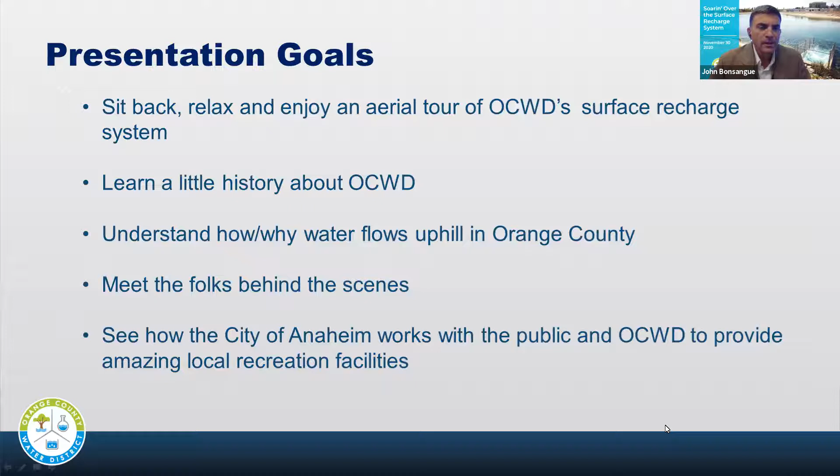At this point, we're going to do a little bit of a video flyover first to give you a, let's call it, a 40,000-foot view of the recharge system on video. And then we'll start looking at individual basins on still shots.

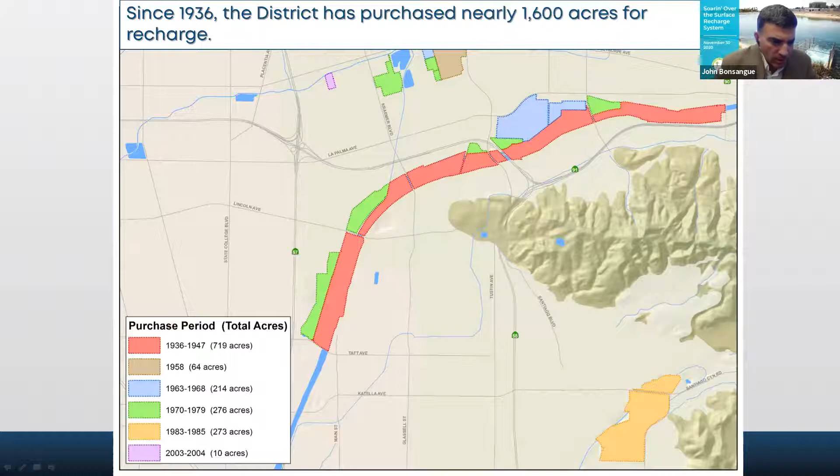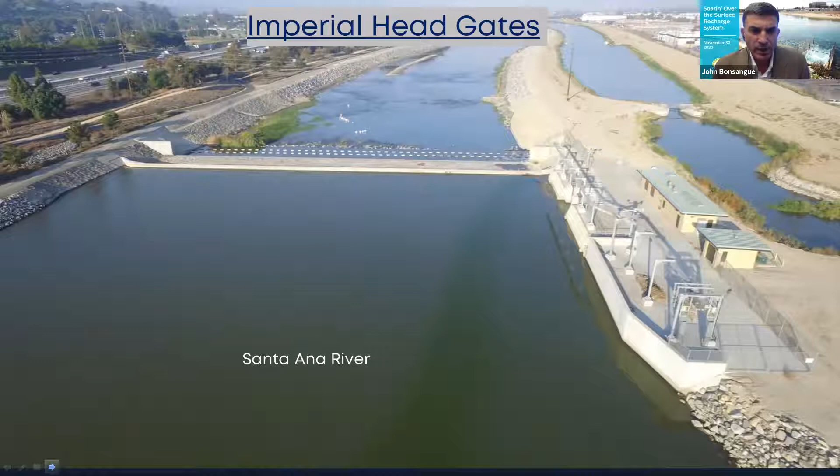This is just downstream of where Imperial Highway crosses the Santa Ana River. This is where we get our first opportunity to divert the water into our spreading basins.

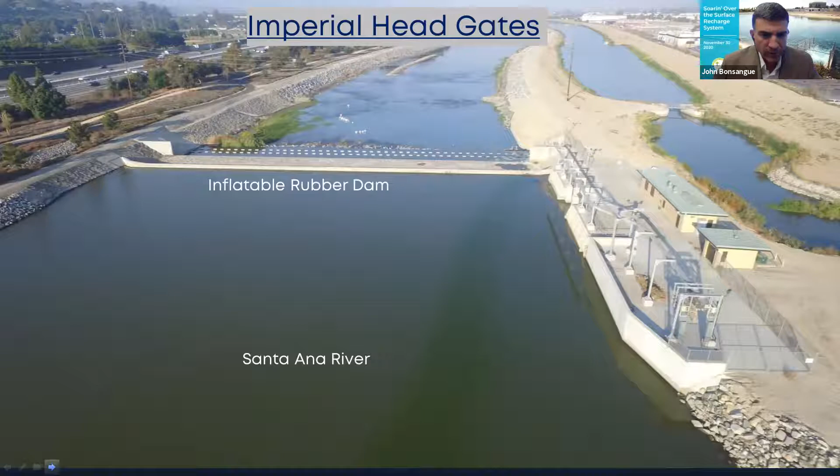We have this inflatable rubber dam, which is inflated in this image, and that dam is critical. It allows us to bypass water right around the dam, as shown in the orange arrow there, or move water into the off-river system, as shown with the second orange arrow there. And once it's into the off-river system, it can move by gravity downstream.

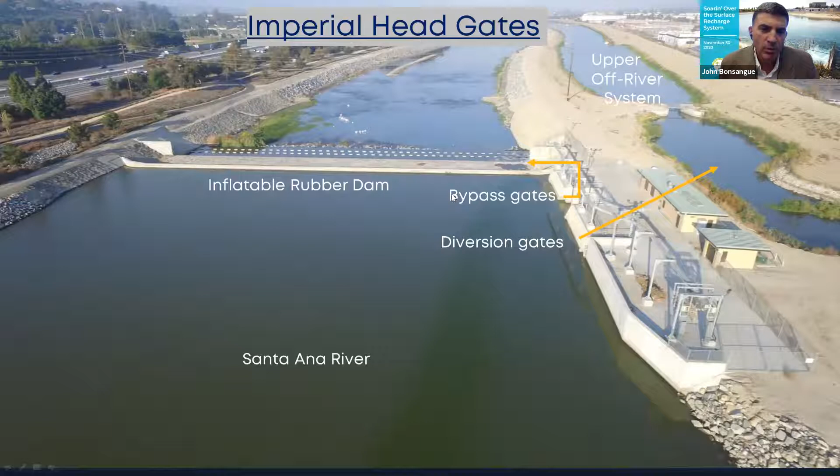I also want to just note that the Santa Ana River is a wonderful percolation facility. So that's why we like to use that, and we have that ability to bypass around the rubber dam. The Santa Ana River can percolate up to 70 cubic feet per second. It's just a wonderful tool. And the district owns about 6.5 miles of river channel.

Prior to the early 1990s, we didn't have that fancy rubber dam, and to divert the water, our crews would have to go out with bulldozers and build sand dikes, and that would be a very cumbersome operation. And if the flows got too large, the sand dikes would blow out. Here's an image from back in that time period when the sand dikes were being employed to divert water off the Santa Ana River.

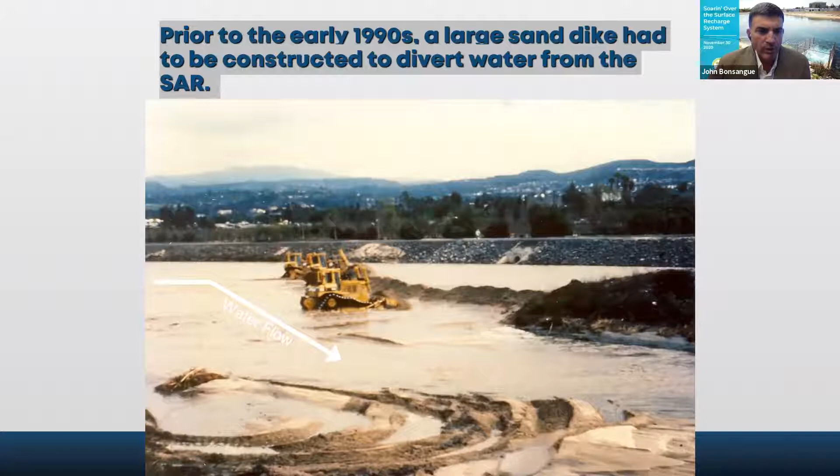So we're kind of coming down the off river here. You can see the Santa Ana River to the left. Weir Pond 3 is at the bottom of the screen, and then Lakeview Avenue for our nice landmark. So the water travels under Lakeview Avenue into Weir Pond 4.

Once it's here in Weir Pond 4, it can be sent a number of ways into various directions. It can be sent over to the Warner system. It can be sent into the Santa Ana River here to the left. Or it can be sent to the upper off-river system, which is just below Weir Pond 4.

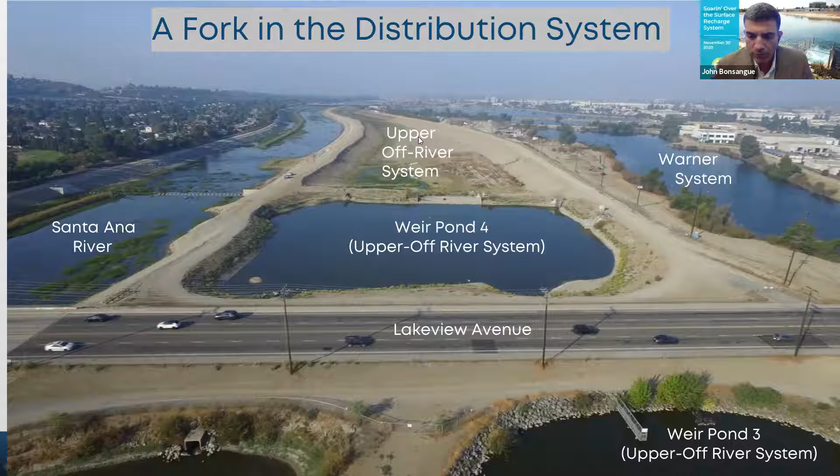And there's an interesting riverbed filtration research project going on in this part of the upper off-river system. If any of you are interested in a technical topic, that would be a wonderful area to explore, and potentially a future webinar. Adam Hutchinson does a great job with that project. So moving on into the Warner system now.

Warner Basin has a public fishing concession, and so does Conrock Basin - that's an enterprise called the Santa Ana River Lakes, open to the public for fishing. I've fished it, it's wonderful. It's world record trout season right now that just started this weekend, and they stock some really big trout.

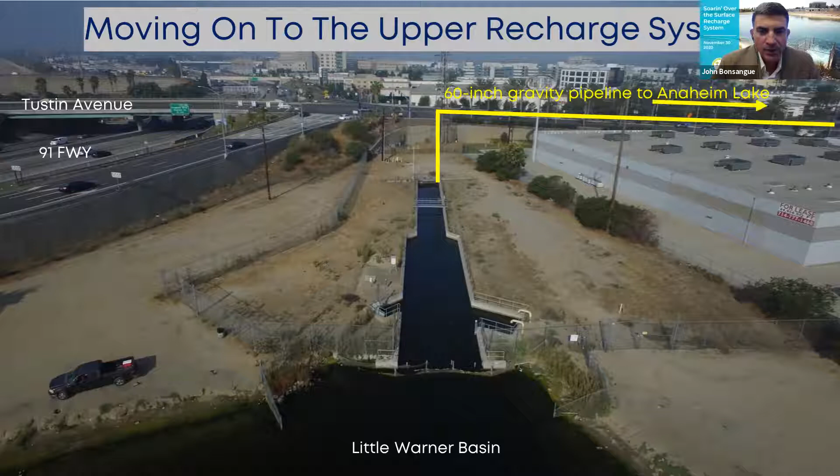Let's take a look at where it ends up - it ends up in Anaheim Lake. If you can see my cursor here, there's a depression right here, and that's where the 60-inch line daylights. So the water travels from Warner right into Anaheim Lake this way.

It's also important to point out that we have an import water connection. We take water from the Metropolitan Water District through this feature, and it takes this concrete spillway down into Anaheim Lake. This basin is equipped with dewatering pumps, so we can remove the water quickly, dry it out, clean it, and have it back online with restored percolation.

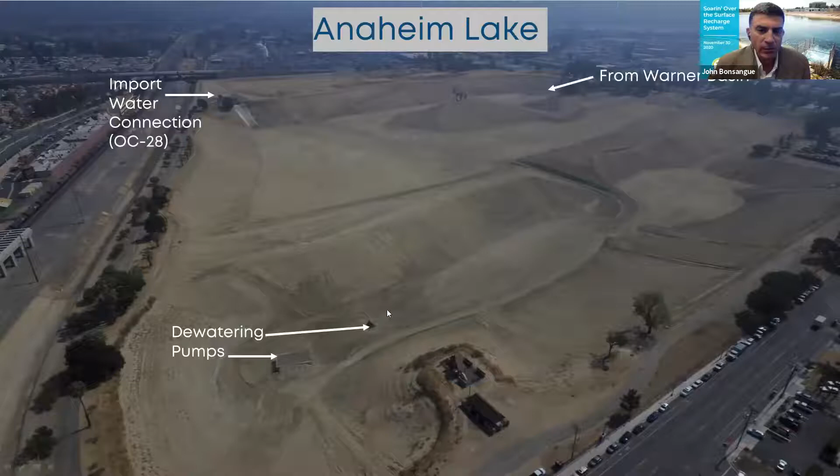This is one of our larger basins - it can store 2,260 acre-feet. Percolation ranges between 20 and 70 CFS in this basin, depending on water quality. The basin can receive import water quality from Metropolitan or from the Santa Ana River flows. The Santa Ana River flows represent the lower perk rates at about 20 CFS, while the imported water percolates nicely at about 70 CFS.

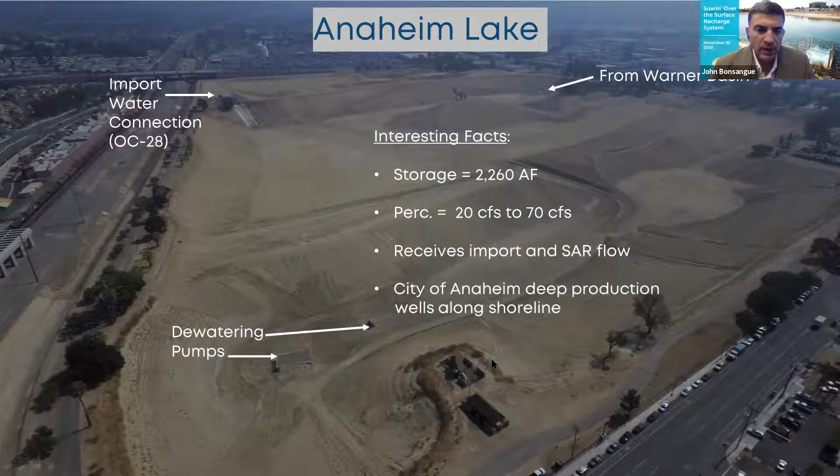It's also interesting to point out that the city of Anaheim has some production wells along the shoreline of Anaheim Lake. These are very deep wells, pulling from 800 feet or deeper, and this basin is less than 100 feet deep, so there's a lot of earth between the two water bodies.

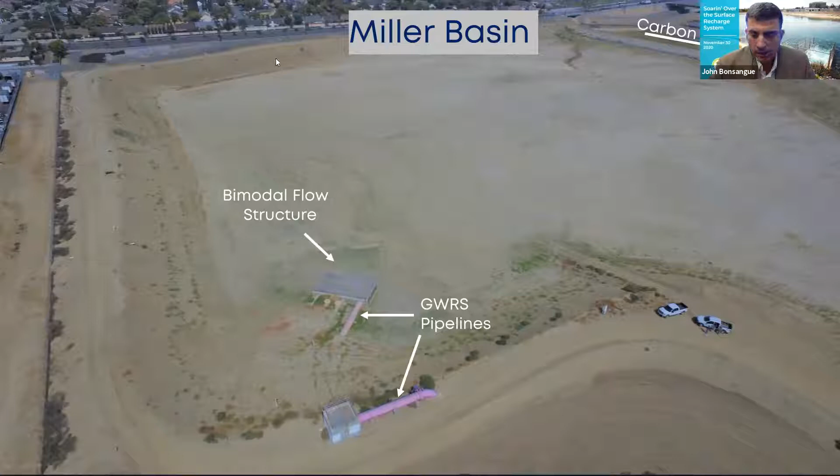Miller Basin is another basin that we use to spread water. This basin can receive the recycled water from the groundwater replenishment system - you see the purple pipes here - and it can also percolate Santa Ana River water. It can hold about 300 acre-feet of storage, and percolation rates range between 25 and 40 cubic feet per second. What's interesting is the OCWD does not own this basin - it's owned by the Orange County Flood Control District, so the primary purpose is flood control.

Groundwater recharge is secondary. This is a cooperative project though, a wonderful project between the two agencies, and like I mentioned before, it can receive the recycled water or the Santa Ana River water.

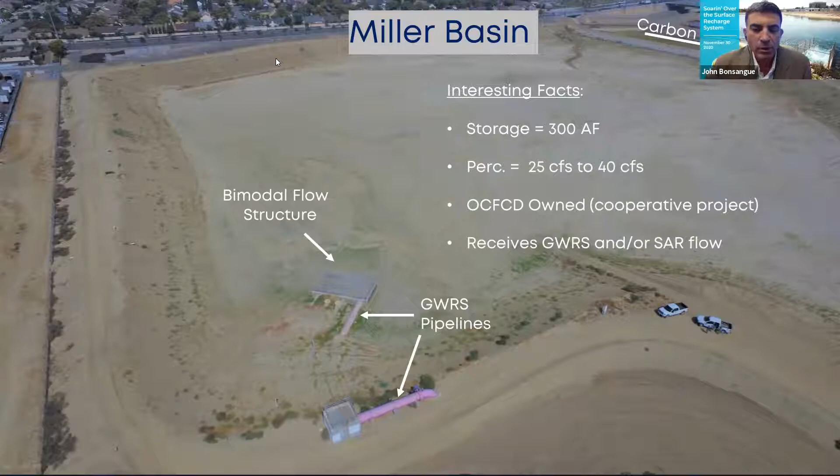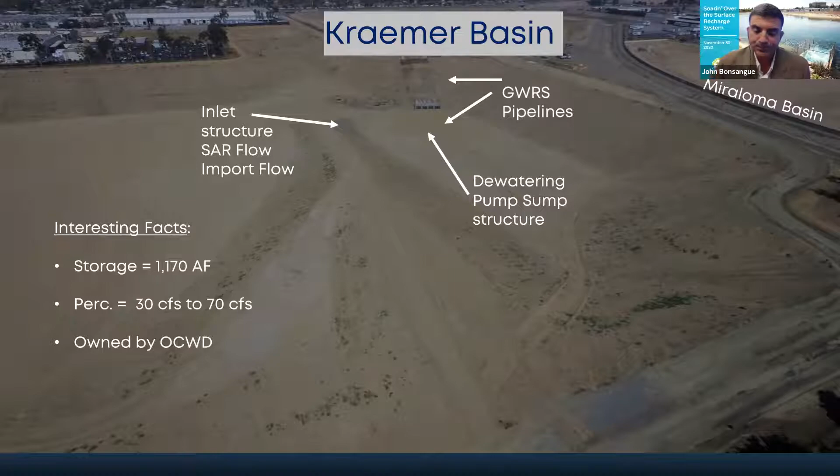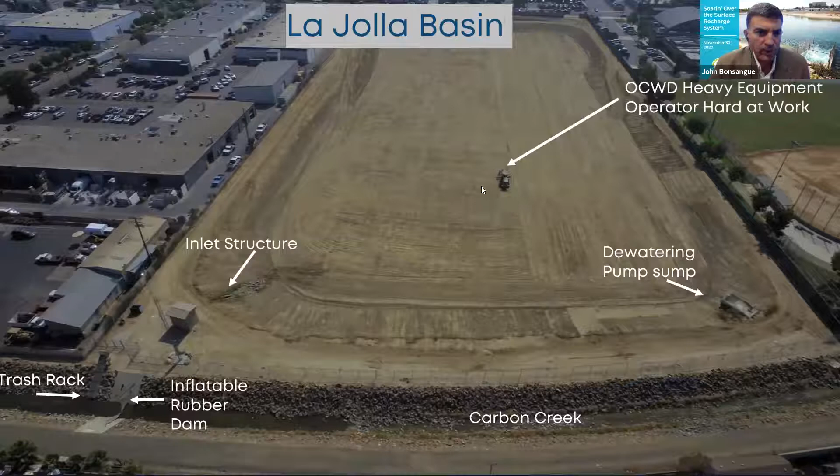Here we have a piece of heavy equipment, with one of our OCWD heavy equipment operators working hard cleaning this basin when this photograph was taken. Some interesting facts about this basin: it can store about 18 acre-feet, and can percolate anywhere between 5 and 20 CFS. It is owned by OCWD. Even though it's small, it really helps us when we try to clean some of the larger basins and we get in a pinch for where to move water. This La Jolla Basin is a real nice tool to have in our toolbox, and it can receive import and storm flow water.

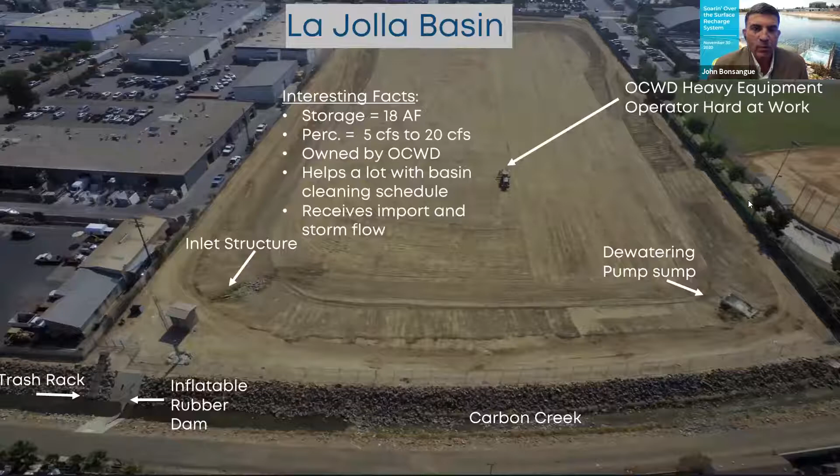Placentia Basin is a pass-through basin owned by the Orange County Flood Control District, but it's a joint project, so they're allowing us to use it in the non-storm season for water conservation, which is a wonderful bond we've formed with the Flood Control District.

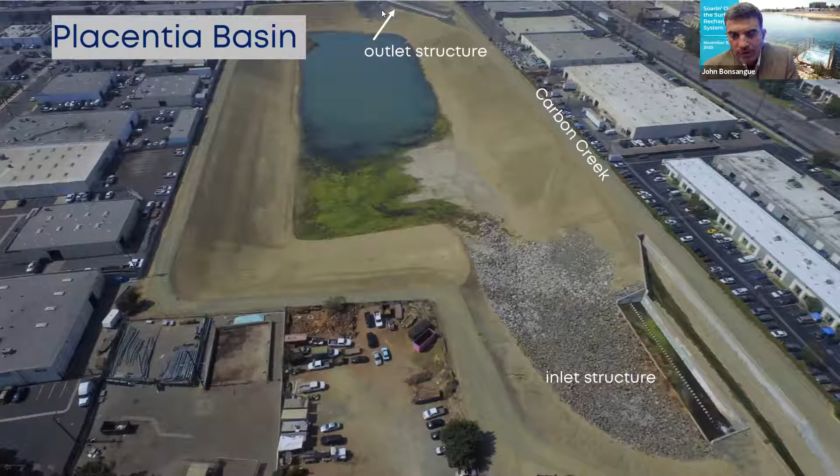You can see Carbon Creek here along the right. Here's your inlet structure, and here's your outlet structure flowing right back into the creek. It can perk up to 10 CFS, and it's owned by Orange County Flood Control.

Interesting here, this one receives some flow from a North Basin Groundwater Improvement Project, a groundwater cleanup project just below the bottom of the screen. You can't quite see it, but they're taking impurities out of the groundwater, and the water is then released back into Placentia Basin to percolate back into the aquifer system.

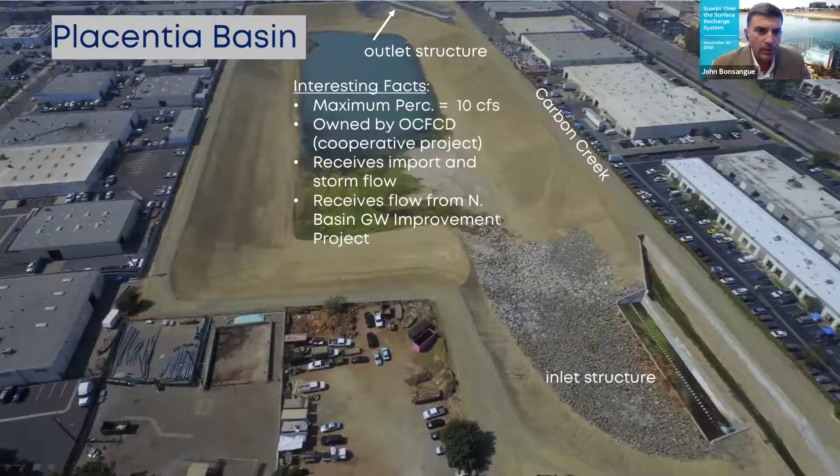Raymond Basin is kind of the end of the line for us along Carbon Creek. It's also owned by the Orange County Flood Control District. Here's Carbon Creek right here, passing right along this high ridge and then moving on down this way.

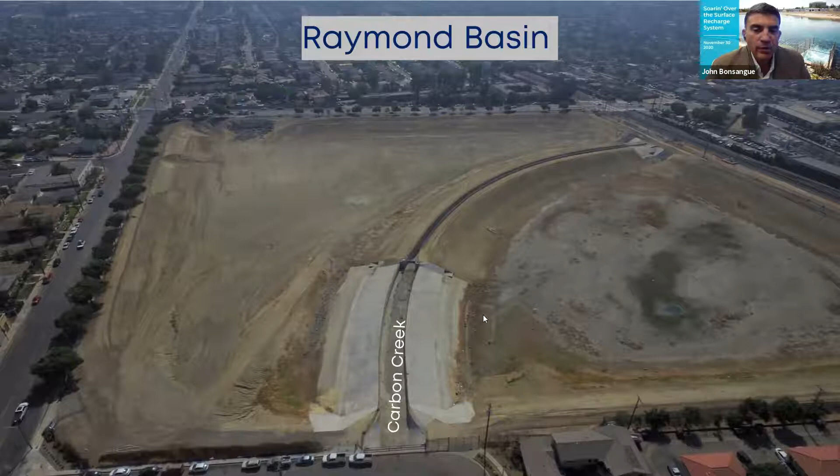These are overflow spills for really high duration storm events. We're allowed to spill water at certain times of the year and store it here for percolation, which is a wonderful cooperative project with the Orange County Flood Control District. This basin can percolate up to 10 CFS, and it receives storm flow while also easing the channel capacity, so it's a win-win.

The spillway handles heavy flows. We won't need to do this often, but when the flows are low, staff will have to go out and insert some rather heavy boards. It takes a couple guys to install them, and it forces the water to come down this concrete spill structure and into the basin.

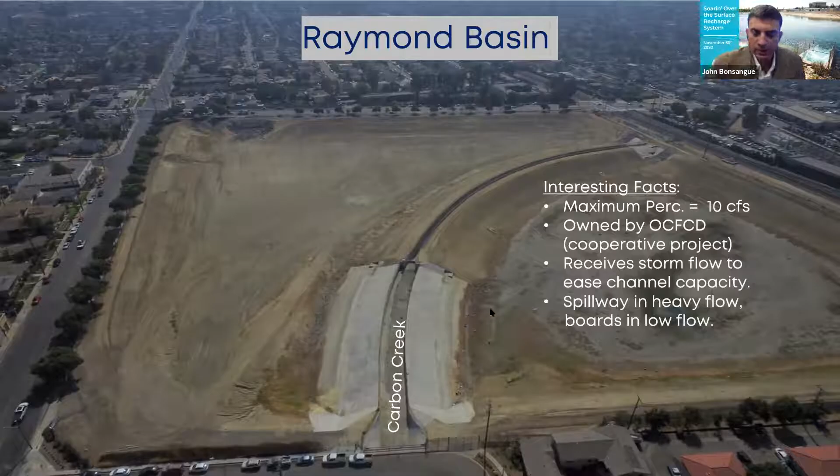Now let's move on to our newest basin. This is La Palma Basin. It's right along the Carbon diversion channel, and it receives strictly recycled water from the Orange County Water District's groundwater replenishment system project. It's beautiful water, very clear, as you can see.

Interesting facts about this basin: it was completed in November of 2016. It can store 97 acre feet and has a max percolation of 90 CFS, which is really high. In the first two years we started flowing to this basin, over 100,000 acre feet went through, which is amazing.

Also, something unique about this basin is it has a split design with a center berm. This was done so we could clean one side while still percolating on the other, which is a really interesting feature.

Also, there's a local brew pub that popped up along the shoreline after we started flowing water into this basin. I think they're called All American Ale Works, right off La Palma in Anaheim. I haven't been there, but I've talked to folks who have, and they say it's A+ beer. So maybe you'll go check it out.

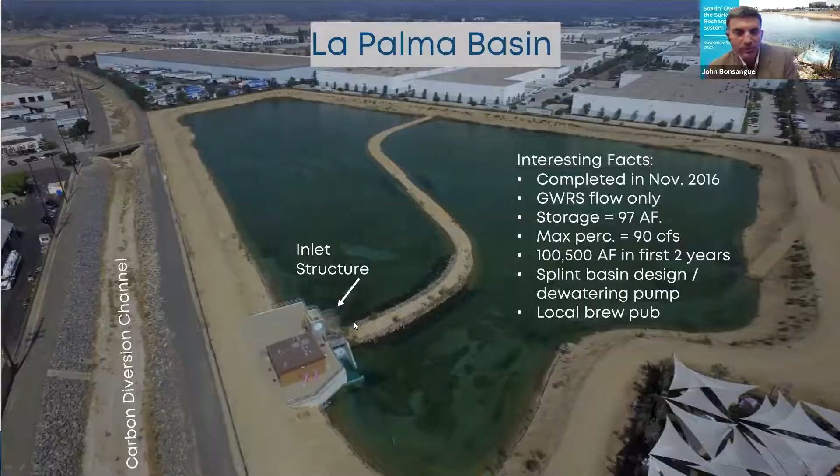One last interesting thing is this waterfall structure here. This is how the water comes into the basin. We're going to close up on that a little so you can see it. The water actually goes up this concrete structure and then spills, forms a little waterfall, and then enters the basin this way.

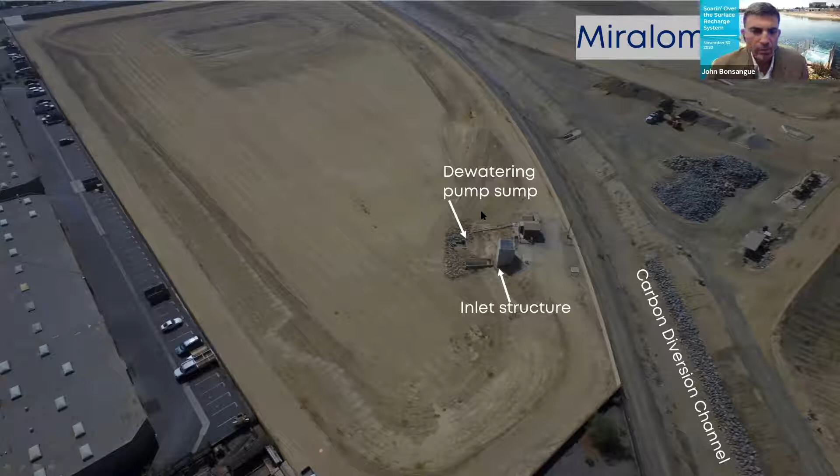Miraloma Basin is another basin built for recharging groundwater replenishment system water, or recycled water. Here's an aerial view looking down the Carbon diversion channel, and here's the inlet structure. This basin is also equipped with a dewatering pump, so it can be evacuated quickly, cleaned, and put back online.

Some interesting facts about this basin: it can receive recycled water, imported water, or river water. It has a storage of 97 acre feet and a wide perk range because it can receive so many different qualities of water. It was recently leased for recreation, for a water park, an aqua park that will be coming next year. So look for that.

And right here, you can kind of see a little depression that we excavated out for some future inflatable water play toys that will be anchored into here. And there'll be a beach here with some parking. And I would highly encourage you to come check us out.

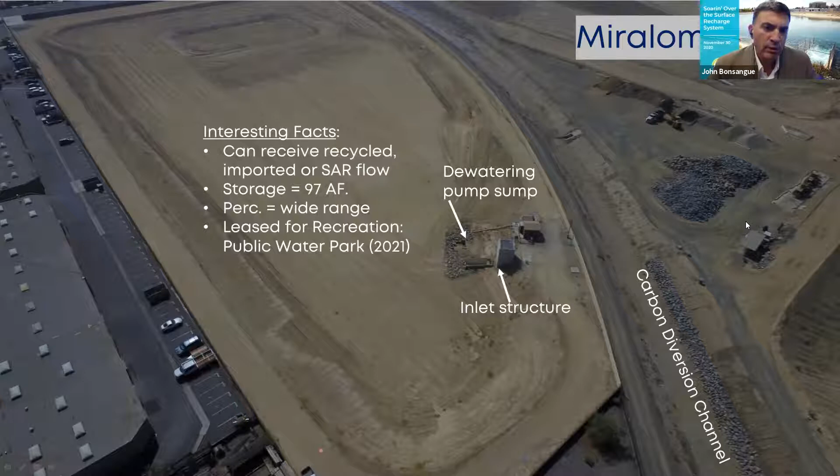I think in May of 2021 is when they're hoping to open that facility.

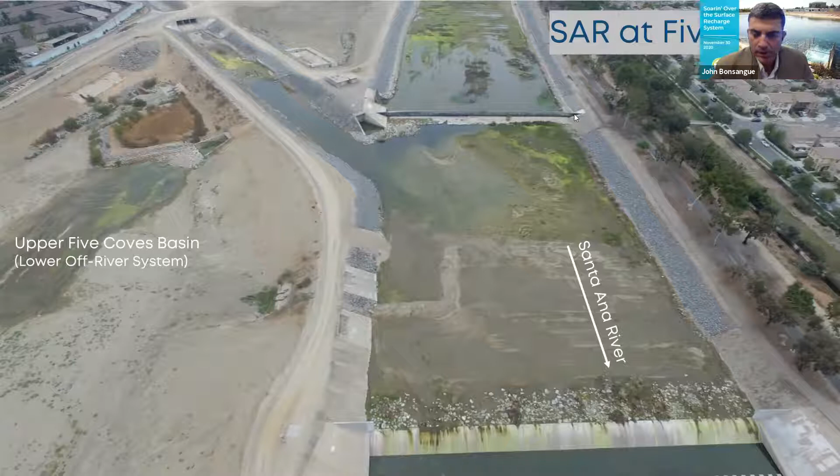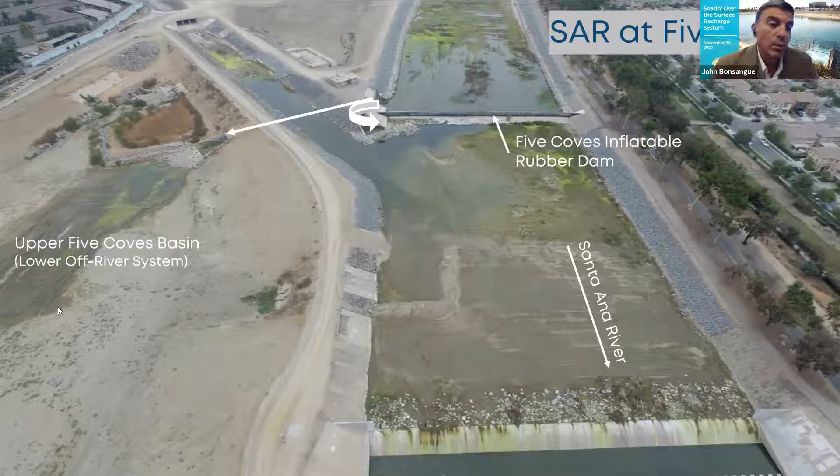Now we just come down the carbon diversion channel here. We're back into the Santa Ana River. And look, here's another inflatable dam. This is the Five Coves inflatable dam. When it's up, it can move water right around and back into the river channel, like that arrow shows there, or it can move water into Upper Five Coves Basin, or what we call the lower off-river system, as shown in this arrow right here.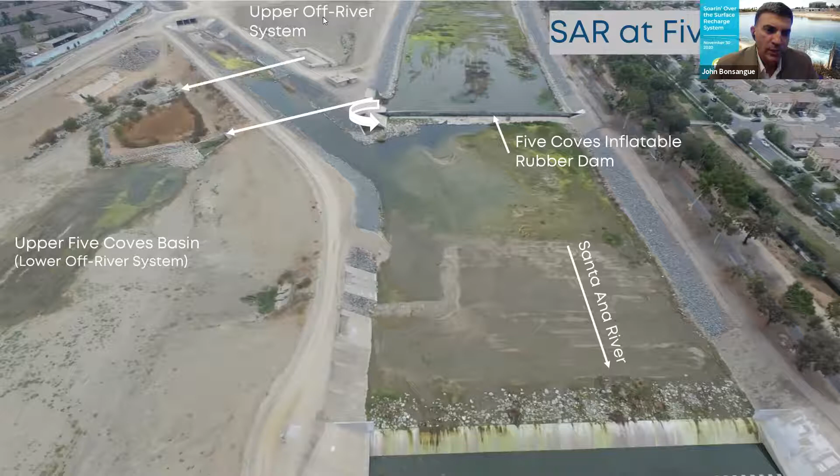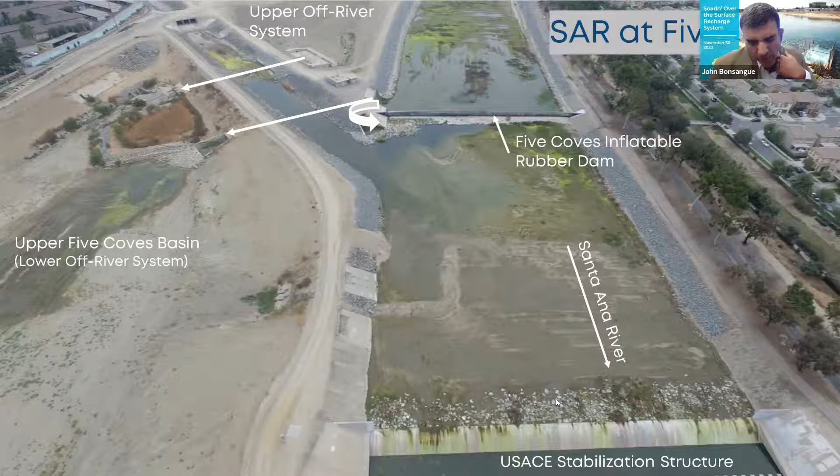So here's the upper off-river up here, and we can also flow water under the carbon diversion channel into Upper Five Coves Basin. And I know there's a lot going on here, but one last point to feature out is this concrete structure here. This is a grade stabilization structure installed by the Army Corps of Engineers to help prevent radical erosion of the bottom of the riverbed during high flow events.

So that's a lot. So we're going to take another perspective on this, a little bit different angle. So you're kind of coming down the carbon diversion here. Here's the rubber dam.

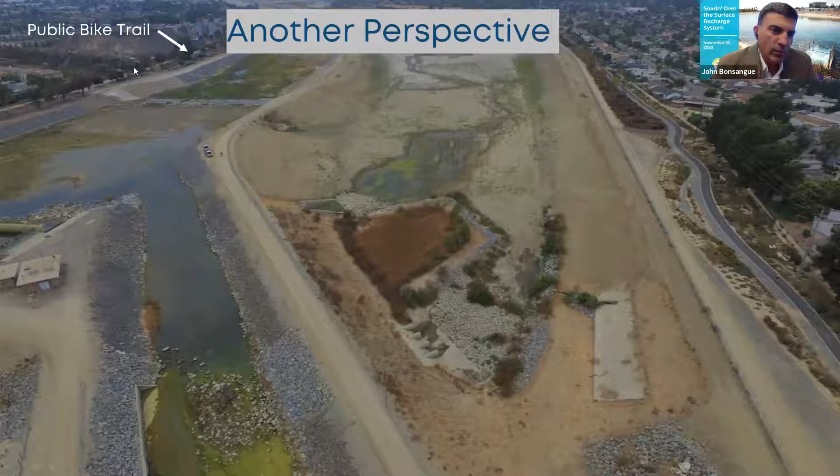A few things I wanted to point out here: the water district partnered with the county to provide the land to build a public bike trail. It's a wonderful trail on this side of the river. And the water district partnered with the city of Anaheim to provide a wonderful park and trail along this side of the river here. It's called the Five Coves Park, and I think we'll be doing a deep dive on that a little later.

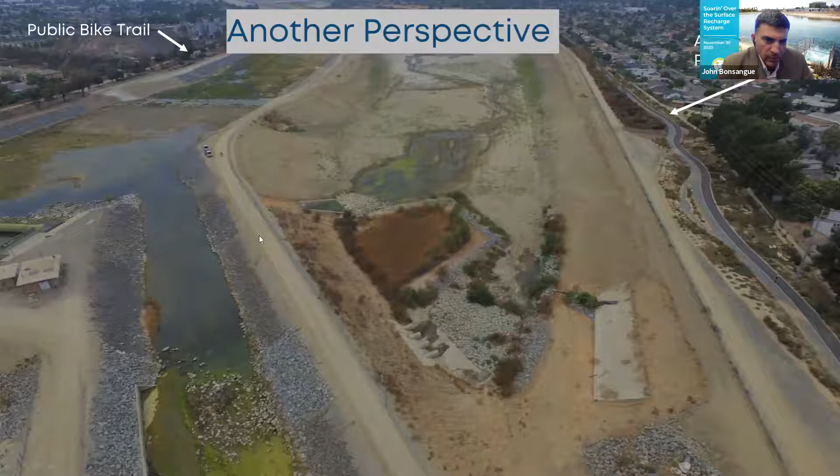But what I'd like to point out is this center levee here. This is a utility access road, and it's private. I would strongly encourage people not to walk or bike along here. I would use here or here, the two banks, for maximum safety. There's bulldozers that are driving here during the day, and there's been close calls, to say the least.

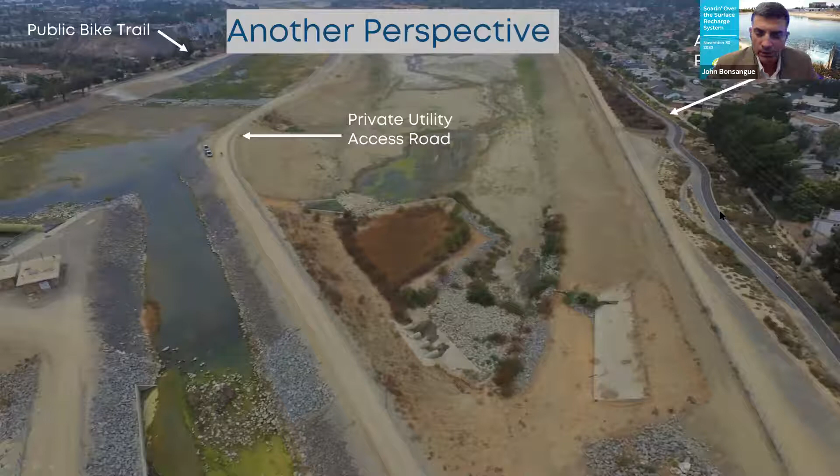So public recreation has been built on both sides, and it's really awesome stuff. I'm a cyclist, and I can tell you firsthand, it's really well done. So moving down, here's the lower Five Coves Basin. We're going to go under Lincoln Avenue now into Lincoln Basin.

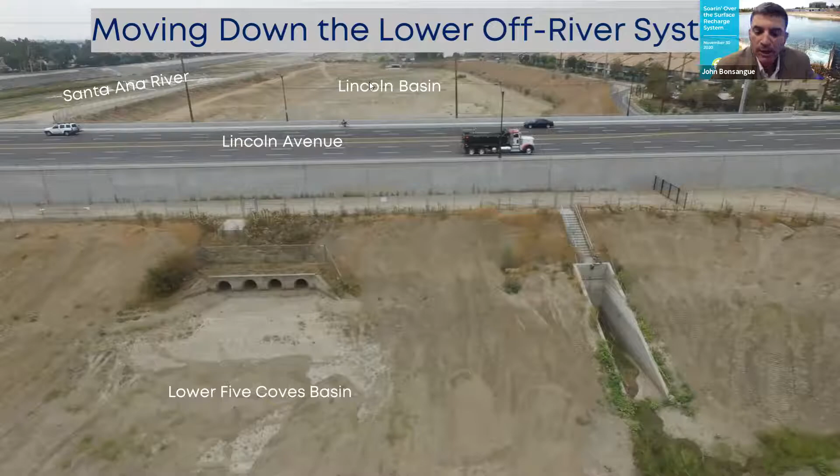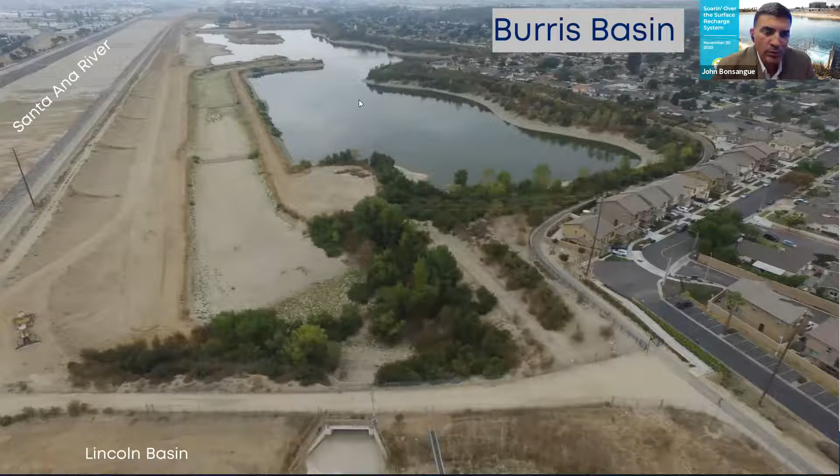Now we've passed through Lincoln Basin, and we're going to go into Burris Basin here. So Burris Basin is a rather large basin. We'll do a little drill down here just for reference. Here's the Santa Ana River.

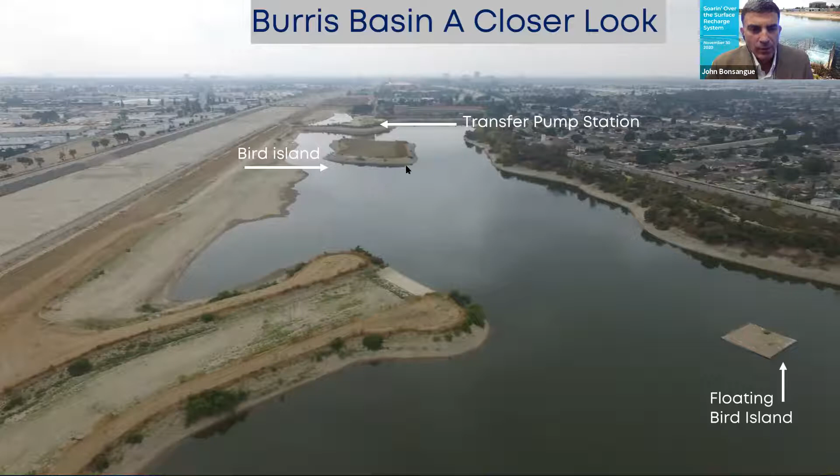Maybe a close up here on Burris, a little closer look. We could not get any closer, incidentally, because there's no fly zone here for our drone. But I wanted to make sure you're able to see the pump station here, the transfer pump station. There's also a bird island here, an earthen bird island, and then there's a floating bird island here that we use.

Some interesting facts about Burris Basin. Inside this building here, there's four 1,750 horsepower pumps that combined can move 200 cubic feet per second and lift it 150 feet in elevation up to Riverview, Fletcher, or Santiago Basins. Also, this area is a bird refuge, and there's that wonderful public trail called Anaheim Cove that starts in this area along the west shore.

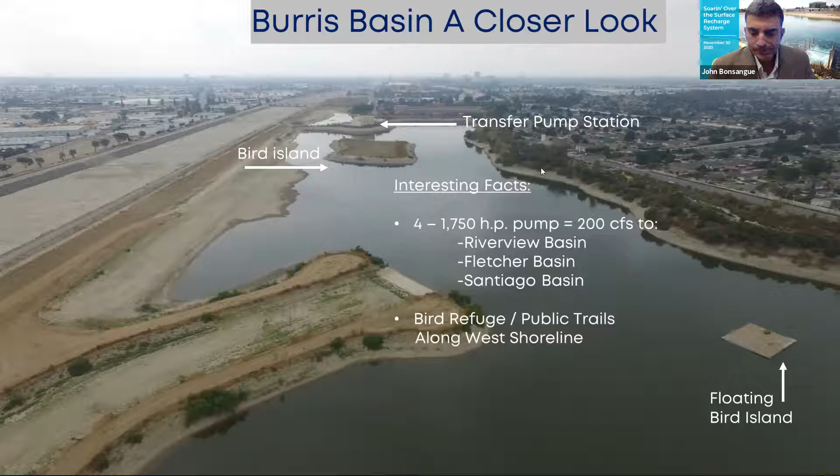Here's an older picture that I threw in here. Many of you may have seen these berm features when you're driving along the 91 freeway, kind of scratching your head, wondering what the heck is that? So this is the main Santa Ana River channel. Here's Burris Basin. And we build these berms, we call them T&L levees, and they're constructed in the river to channel the flow up, down, and cross stream. And we do this to increase the amount of time the water has with the sediments in the riverbed to maximize the percolation.

So if you'll follow along with me here, we'll see if I can get this animation to work on the flow direction. So the water starts out flowing downriver. That's the downriver direction. And then it hits that berm and it moves sideways. Then it hits the next berm and it has to go upstream. Then it hits the next berm and it has to go cross stream again. And then it hits the bank, and it has to go all the way downstream.

And then the cycle repeats itself all the way down. There's a crew of wonderful people you're going to meet here in just a minute that are responsible for creating these berms. They do get washed out quite often when flows pick up, and they have to be rebuilt several times throughout the year. I should also mention that these levees provide great nesting and roosting habitat for many of the waterfowl we find in our area.

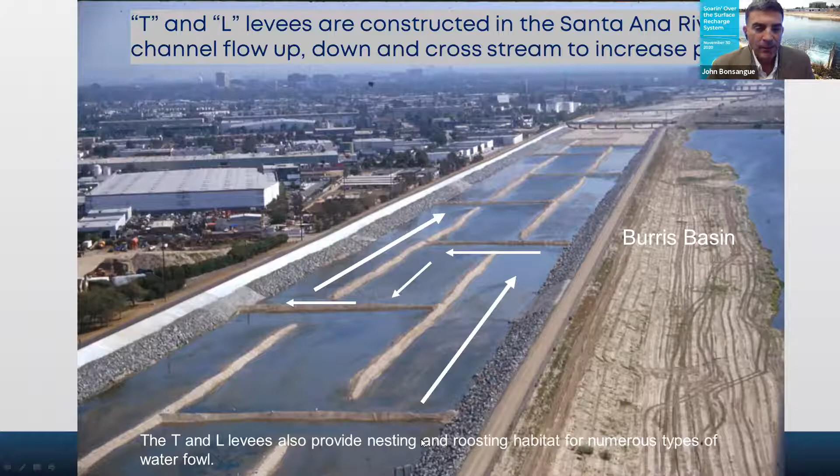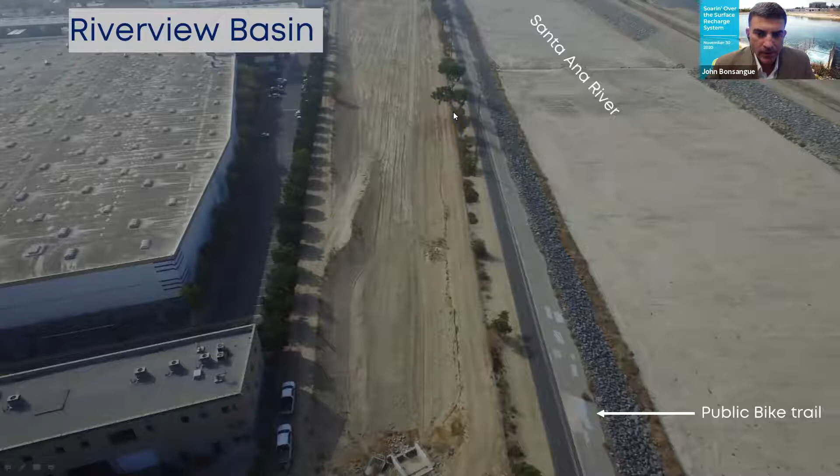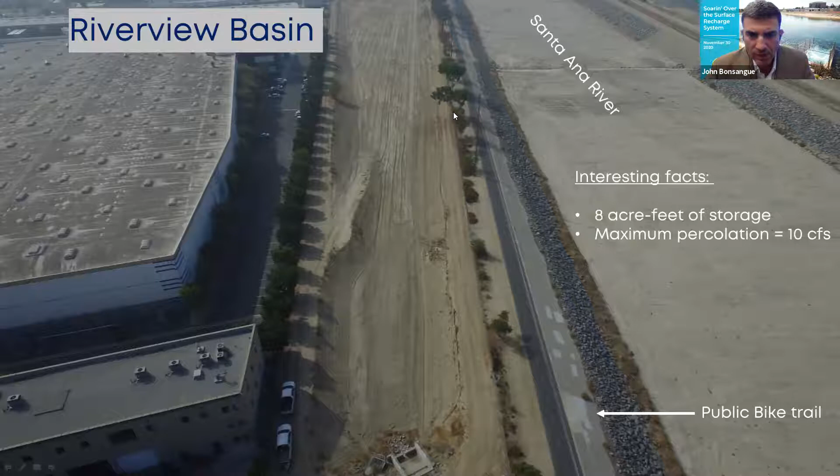This is Riverview Basin, just on the other side of the river from Burris Basin. It can take a little bit of water off of that pipeline that's moving water up to Santiago. Interesting fact about Riverview: it can store 8 acre-feet of water, and it has a maximum percolation in the 10 CFS range.

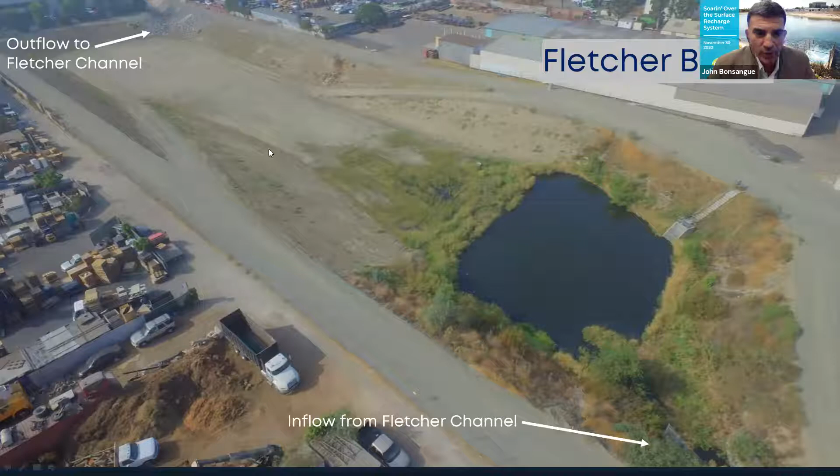Fletcher Basin, very close to Riverview. This is a pass-through basin owned by the Orange County Flood Control District. Inflow comes in this way from Fletcher Channel, passes through the basin, and exits back into Fletcher Channel this way. This is a cooperative project, again, with the Flood Control District. It can receive flow from storm runoff, and it can also receive flow from Burris Basin. It has a maximum percolation of about 3 CFS.

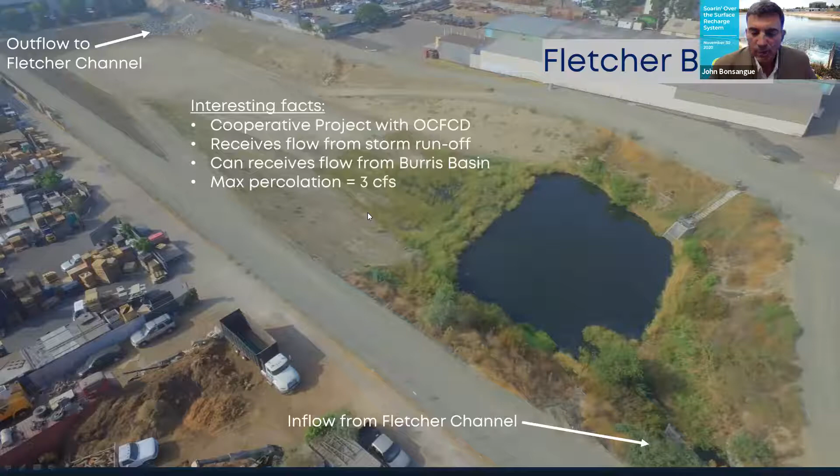So the final resting spot for our recharge water are the Santiago basins, and there are 3 basins that combine to make the Santiago basins. The first is Bond Basin, then we have Blue Diamond Basin, and finally Smith Basin.

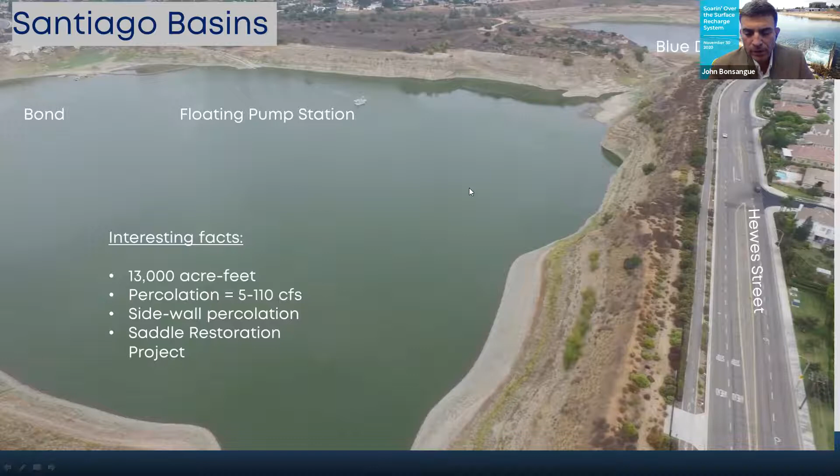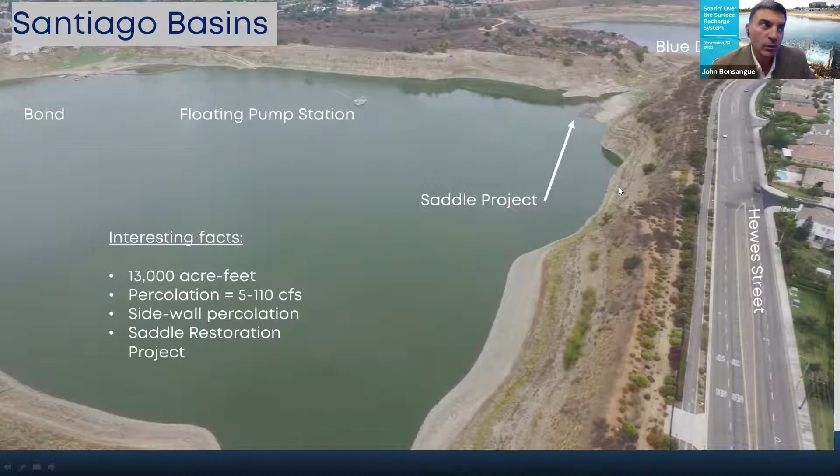Interesting fact: we had a really wet year in 2010, 2011, and that winter it blew. This used to be an earthen saddle that separated these two basins, and they were connected by a pipe. The flows were so great during that storm that it blew out this saddle, and we are now in the process of rebuilding it. We were fortunate enough to secure some federal funding, and we'll be going after this project real shortly, starting next month, January 2021. So look forward to that.

So now what I'd like to do is introduce you to the people that make this whole operation possible. I refer to them as a family because we work so well together, and we do consider ourselves to be a family. But we also go by the name of the rechargers.

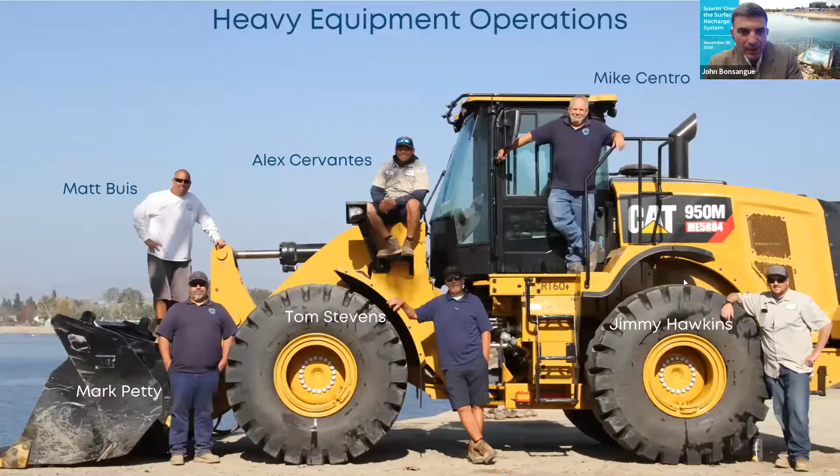In terms of heavy equipment operations, we have our latest piece of equipment here, our 950 loader. Standing on it on the left is Matt Buis. Then we got Alex Cervantes and Mike Centro. We got Mark Petty right here. Tom Stevens is the leader of this group, and Jimmy Hawkins. Folks, let me tell you, these guys have the best work ethic I've seen. They're every day so good about coming into work, making sure their equipment is properly running before they go out, and they do a great job cleaning our basins and making sure the water is channeled the way it needs to be channeled. All of them are a pleasure to work with.

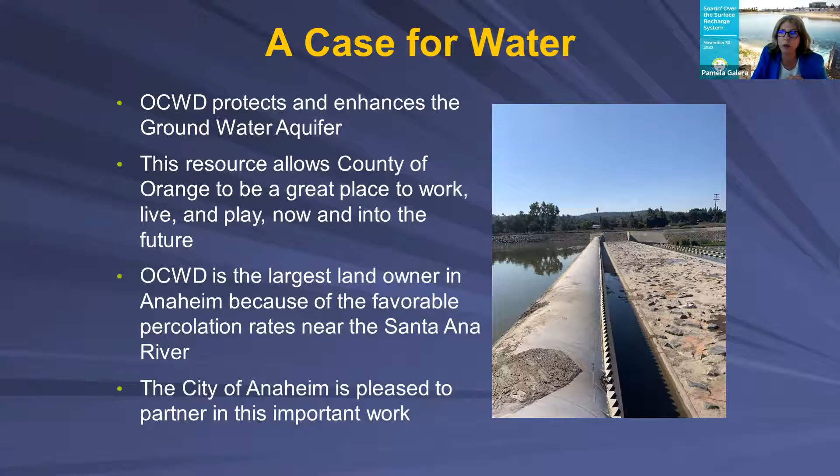One thing that I think is very important, John went over all the complicated work that they've been doing, but it's my understanding that we are very uniquely placed in Orange County to have this incredible resource of our groundwater aquifer. And I do believe that in decades to come, Orange County will compete very well on the international market because we have this incredible resource. It's my understanding that other watersheds do not boast the groundwater recharge aquifer that we have. And so we all know that water is such a precious, precious commodity, and it's so important that we all work together for it.

Some of the challenges that we're facing in Anaheim is urbanization. As you know, sorry, technical difficulties. So the case for urbanization, we all have, folks, we have a housing crisis. Everybody knows it, and we have a problem with affordable housing. And so what we're seeing in Anaheim is actually more infill development. Drive around downtown or around the Platinum Triangle, and you can see a lot of great condos and apartments going in. Some of them are really nice, very high quality living. I would certainly consider living there.

And by having this infill development, we are saving those green fields and saving that prime habitat out in the green fields. But there are costs of this. With this increased population and density in our urban areas, there is a real strain on our park system. We are looking at a lack of parkland, and then of course a lack of a 10-minute walk.

So the 10-minute walk is promoted by the Trust for Public Lands, and it's the opportunity for someone to walk 10 minutes to get to an open space, a trail, or a park.

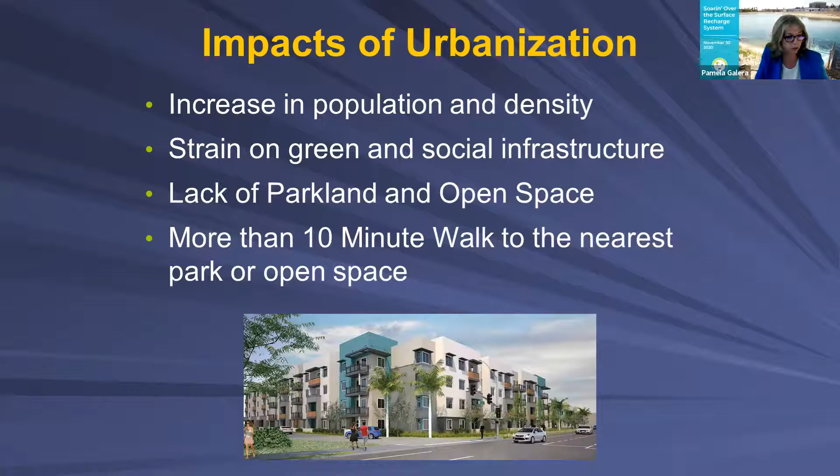All right, so we've got a lack of parkland, a lack of trails, a lack of connection with nature. What do we do about that? In Anaheim, our city planners are looking at this opportunity, and of course we're working very closely with other landowners in Orange County. We are working closely with the Orange County Water District, but also other utilities. As John just explained, the Orange County Water District is the largest landowner in Anaheim because of all the wonderful things they're doing for our groundwater recharge system. But there's also an opportunity to use that land, to make it open for the public.

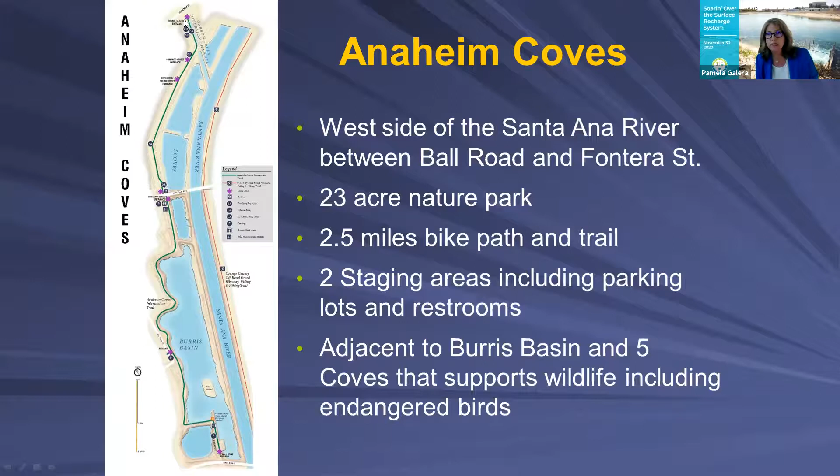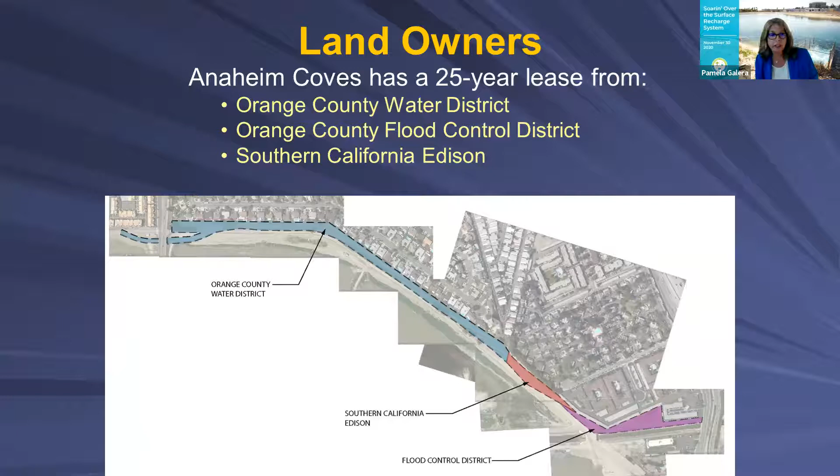All right, so Anaheim Coves—we're so very proud of this project. It starts here on Ball Road, goes through Lincoln, and all the way up to Frontera. Our park is about 23 acres, but it sits on the Burris basins, which is well over 100 acres. We worked with several property owners; the city of Anaheim actually does not own any of this property. John was explaining how he works closely with the flood control district, and so does the city of Anaheim. We also work closely with Southern California Edison to create this parkland, and we received a lot of grants.

And so in the city of Anaheim, we are very creative about finding funding for both the construction and maintenance of these facilities. We did receive grants for the development of this large park, but the maintenance is paid for out of our general fund.

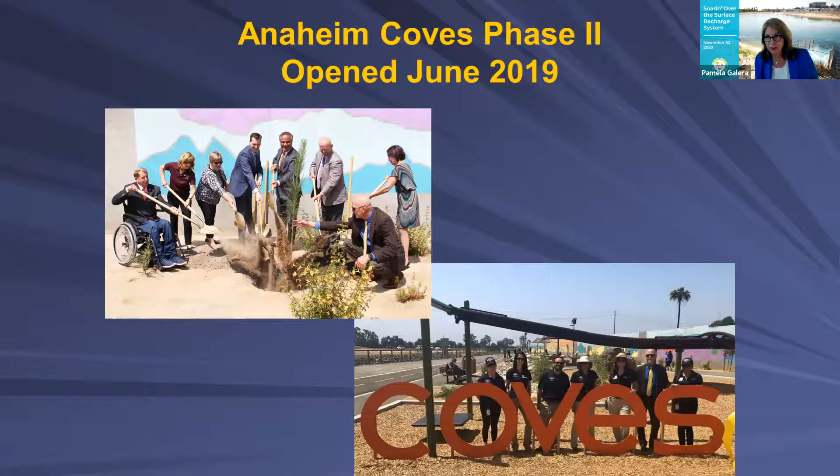Phase 1, between Ball and Lincoln, was opened in 2011, and phase 2 was opened just a little over a year ago. This is also the children's park that's very close to Frontera Street. So if you have children, I recommend you come and enjoy this nature park.

I am a big advocate for native plant material. Where possible, we should all consider using native plants, especially at this wildland interface here next to the river. Why are native plants important? Well, it's those that use it—not the people, but the nature out there. The bird's nest to the right belongs to the least Bell's vireo, a very endangered bird. We're proud to host a home for this bird, along with others.

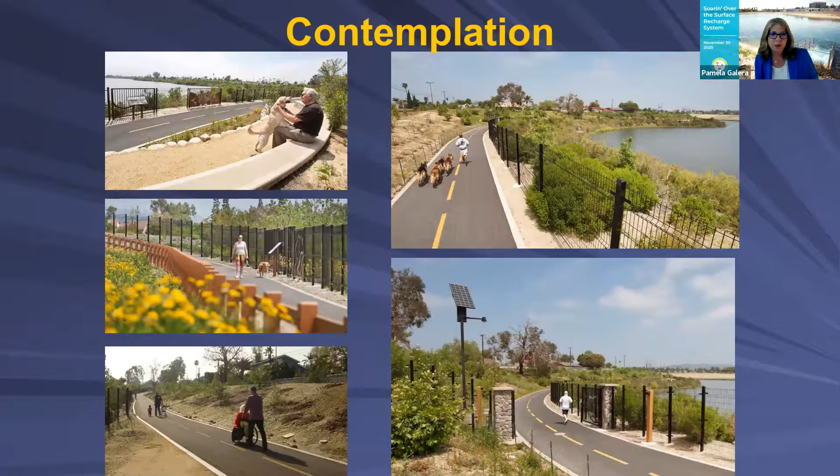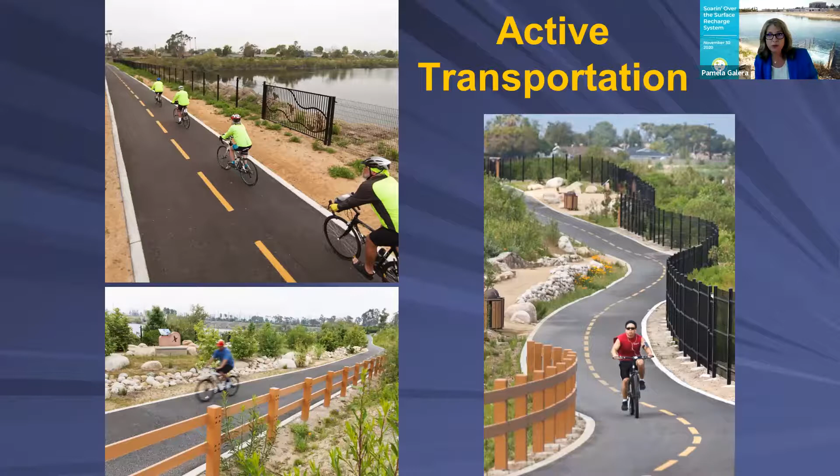This is—if you go to Anaheim Coves, you feel like you're not even in the city. It's a quiet place where you can meditate, read a book, or enjoy your dog. We've also installed a lot of art, including poetry and haiku, as shown in the picture to the left. We find every opportunity to install art. This is a place where people can get healthy, and also, as I said before, a place for active transportation—an opportunity to ride your bike to work or school. And of course, we always think about children, finding opportunities to bring them back to nature and out of their homes and off their devices, out to a city park.

All right, so this is a chance to tell the story. Sorry, shout out to those Hamilton fans out there. And this is an opportunity to tell our story.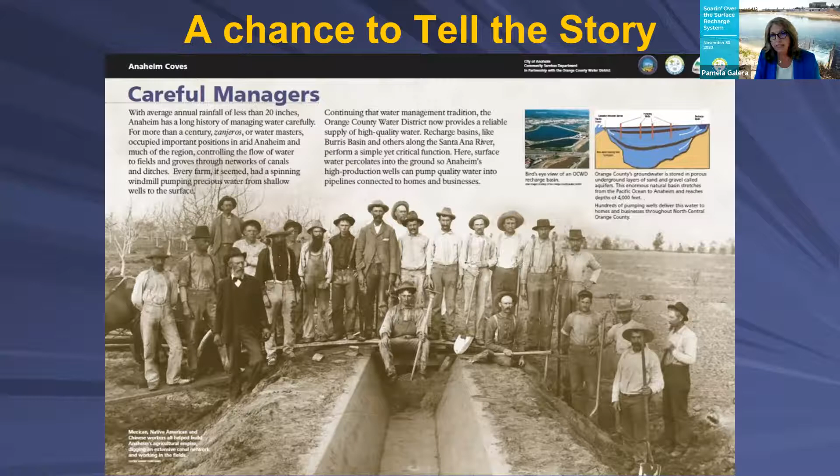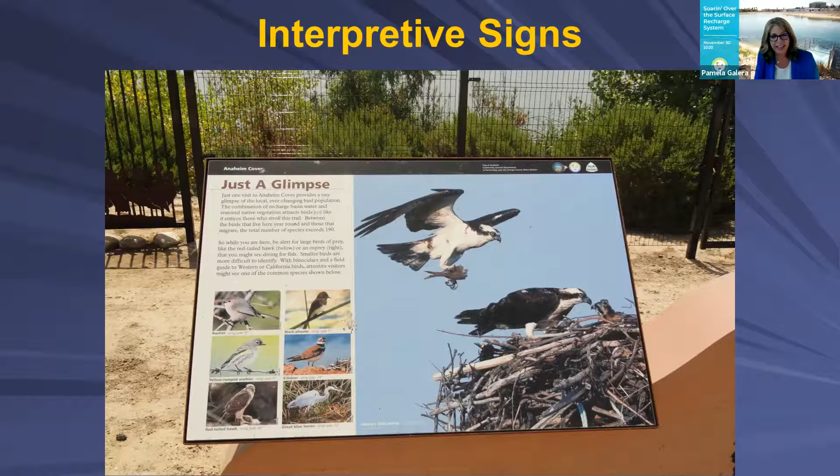Along with the art, we also have interpretive signs all along this facility. We worked really closely with the Orange County Water District to really get the story down of how important water is to Orange County. We also tell a story about how important our native birds are. This picture here is an osprey, and we do have a family of ospreys there at Burris Basin. Again, this is an opportunity to tell the story about the watershed and how important water is.

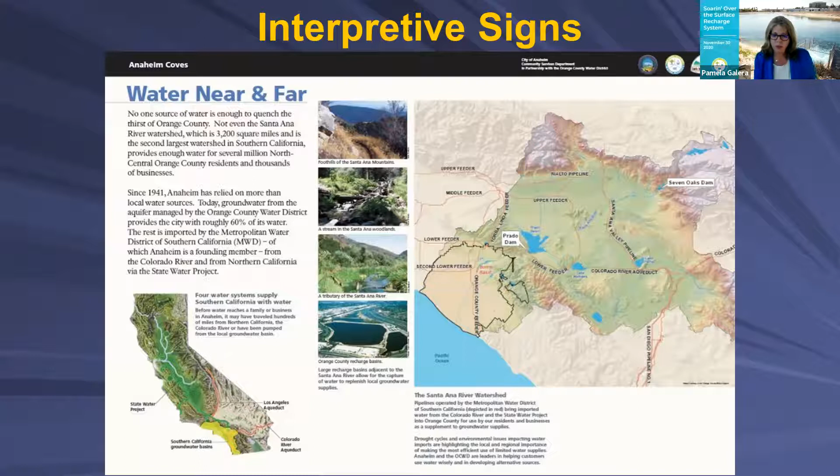Now, these are panels that are set at the park. We're looking at other opportunities in the future to use your device and something like a QR code where you would actually be able to go online and find out more about the story that is out there, including the history of Anaheim.

All right, so what's next? We're complete with Anaheim Coves. It's being used by the public, and it's very loved. So now we're working closely with the Water District to go south. Anaheim Coves is about 2.5 miles long north of Ball. Now we're looking for the opportunity to go south of Ball for about a 2-mile stretch. We've been working with quite a few other agencies, including the Flood Control District, about an opportunity to revitalize the river and actually create a river walk in this area, as many cities have.

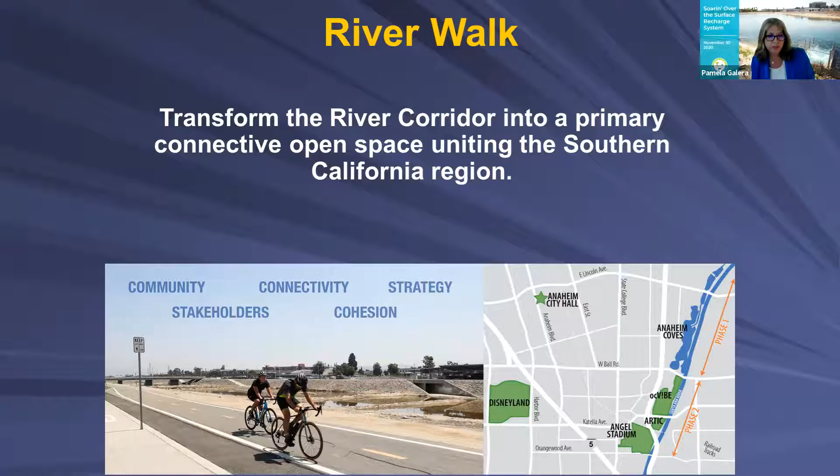You can see in this picture that this facility is already used by bicyclists, but we'd like to open it up to others. So I know you can't read this map here, but I just wanted to assure you that the city of Anaheim is working hard to really visualize what could happen in this corridor.

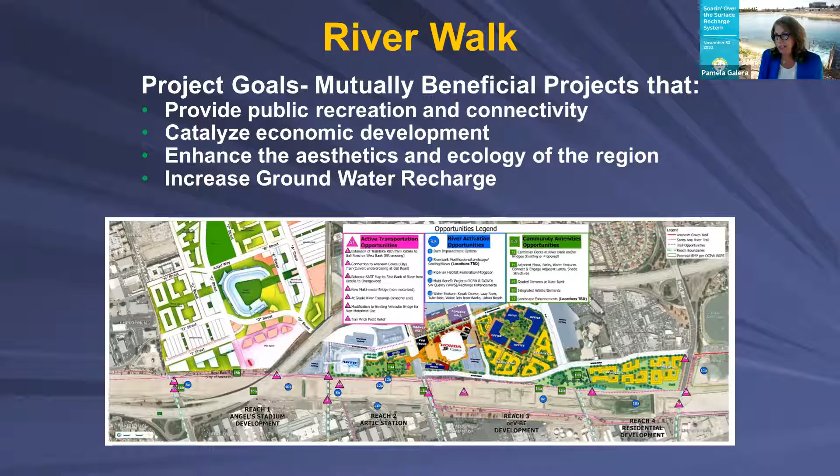We have a lot of stuff going on. Recently, we've brokered a relationship with the Angels, where the Angels will be developing land around Angel Stadium, and also the Samueli Corporation, the Ducks, are developing OC Vibe, which is going to be near the Honda Center. The city of Anaheim is looking at opportunities to revitalize the river, and that is going to be happening in the near future. If you'd like to find out more about that, please feel free to reach out to me.